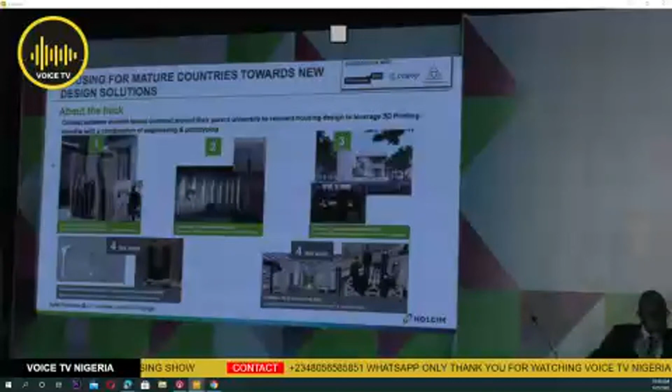For us, it's impressive, and we're quite happy. This is showing different aspects of the 3D work we create with various universities. For Nigeria, our approach is building a 2-bed hospital project as a CSR, somewhere in Shagamu, using 3D printing.

So in terms of technology and resources, we have it. We're working with a sister company of Lafarge, based in Kenya, that will be using this across the entire continent to run operations in Africa.

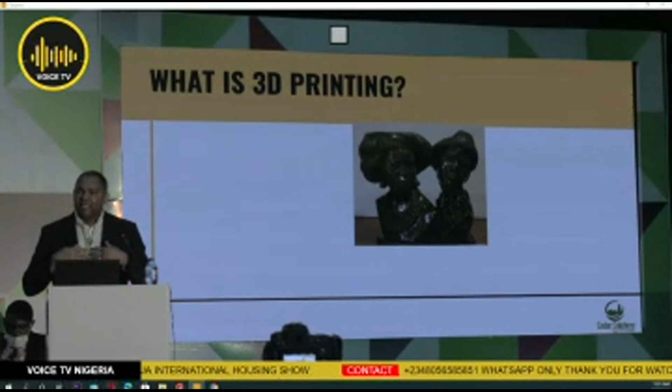But the first thing, of course, is that you need to come up with the product you want to design or fabricate, whether it's a house, an engineering part, whatever it is. The starting point for that process is the design, so you need to use design tools to produce what you want to fabricate.

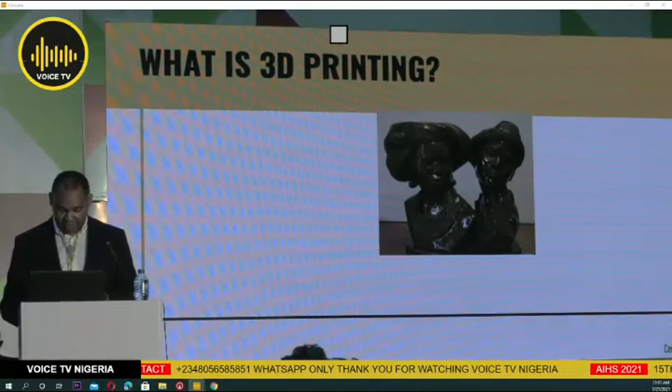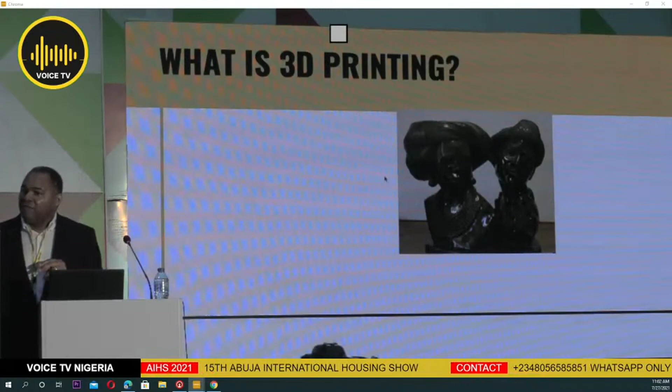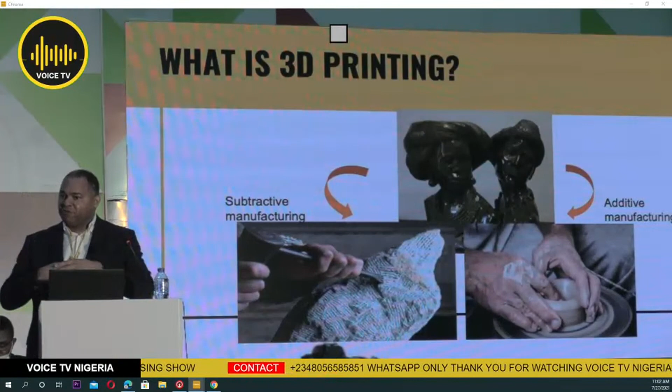I'll quickly give an overview of the process of 3D printing. Imagine you have a sculpture. There are two ways you can actually produce this sculpture. First is by taking a block of stone and chiseling out everything that doesn't look like the sculpture. The second is by having a free surface on which you start putting materials together until a 3-dimensional structure is built.

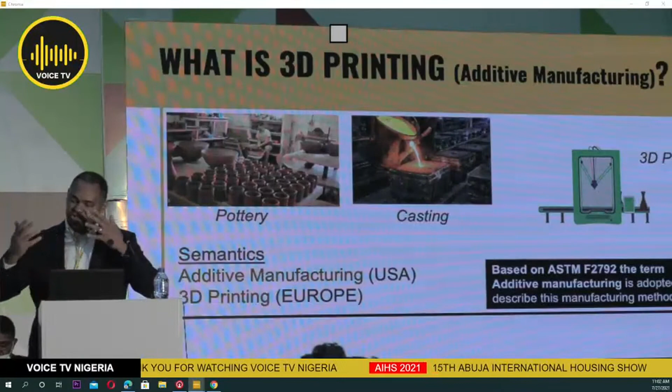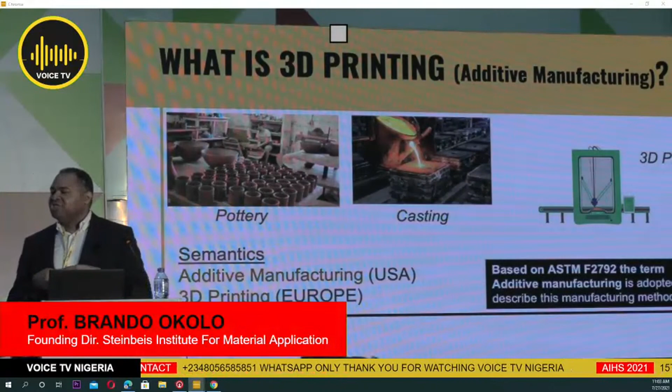So in both cases, in the field of manufacturing, the first example is called subtractive manufacturing, where you have a big block and chisel out material until you have your final product. The second is called additive manufacturing. I'll come to why 3D printing is being scaled up to additive manufacturing. Additive manufacturing involves putting materials together in whatever form, whether pottery work, casting, or of course 3D printing. So the word 3D printing is used generically to describe the technology, but strictly speaking this is called additive manufacturing. What you find in engineering textbooks, in academic literature, is the term additive manufacturing.

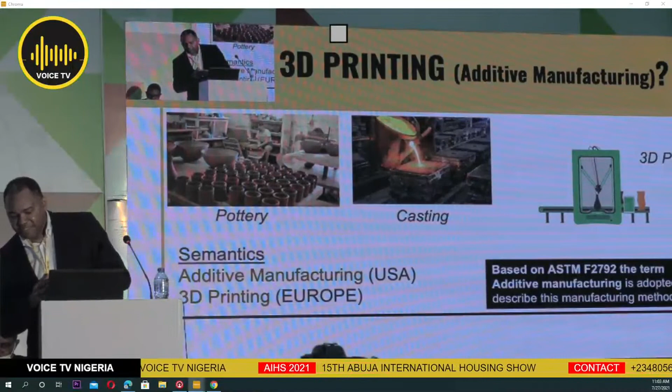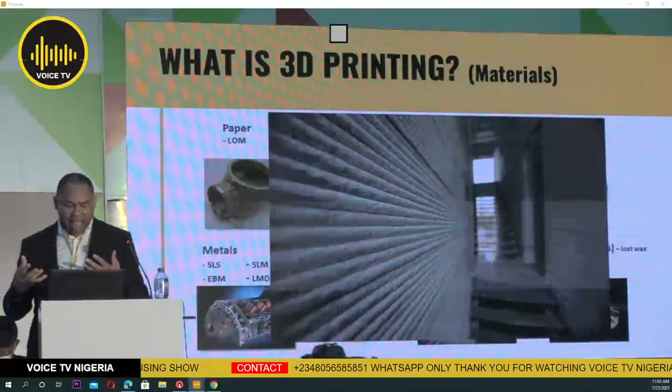And so today, essentially all existing engineering or technical materials can be 3D printed or additively manufactured. You can 3D print paper, glass, ceramics, polymers of all forms, metals, concrete as we have it today, and all kinds of other composite materials.

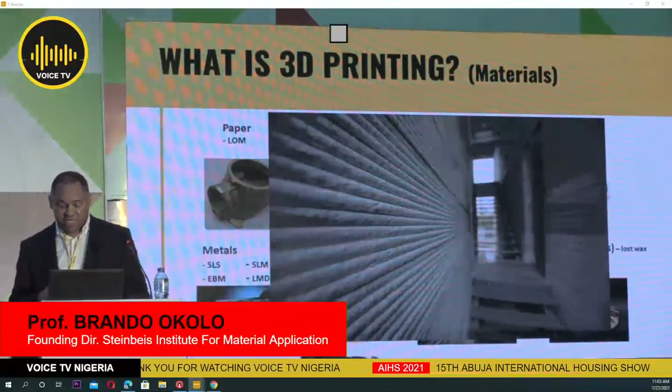So what does a 3D printing workflow look like? You start off with a design, and that design can be generated either using your computer-aided design tool, or you could use a 3D scanner to generate that design. The data you generate is then prepared for the printing process, which is simply a transformation of your data format into a machine-readable format.

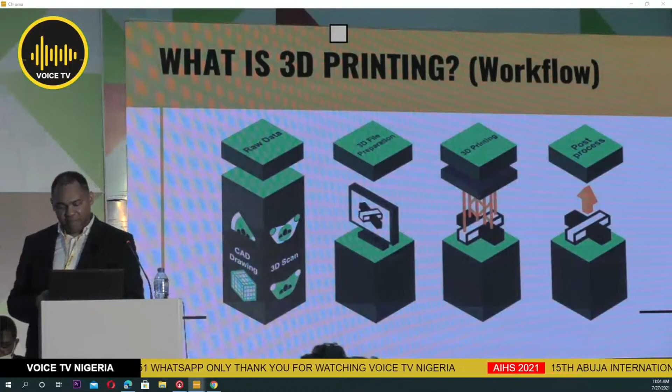And the machine-readable format allows you to print or lay down materials in a layer-by-layer fashion until your three-dimensional structure is formed. So you see a system that allows you to build structure, and build it fast.

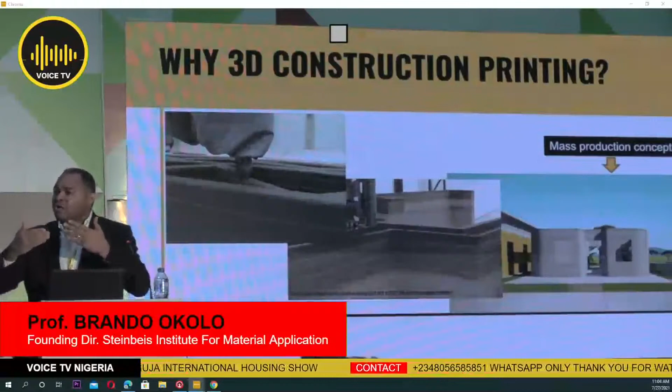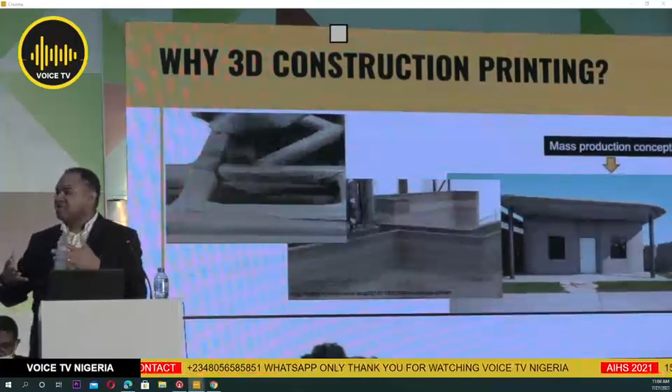If you could scale beyond just building one structure fast, you can go to a point where you're building several and building fast. Imagine this very conservative construction industry becoming a mass production line. This is what we're looking at, a case where you can take this technology and not just build one, but build several in a very intelligent way.

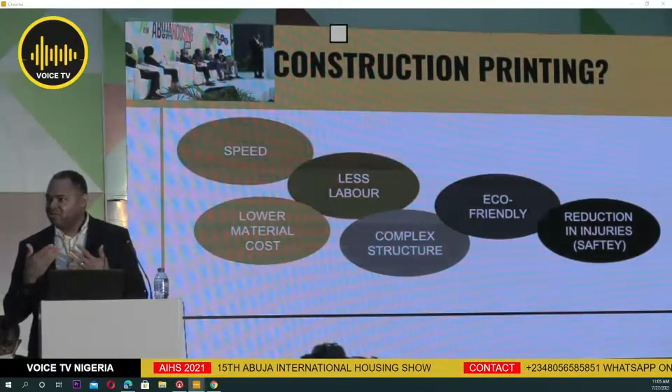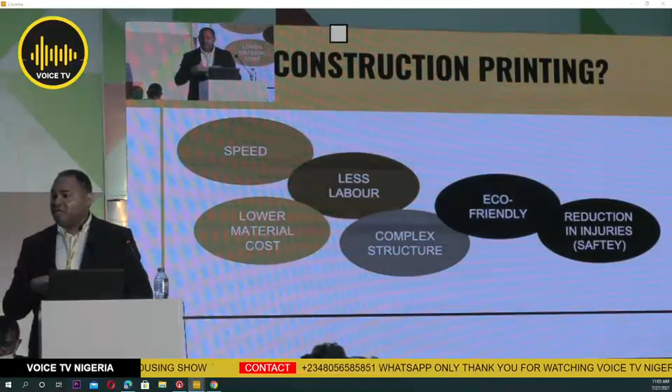The key components that make this technology advantageous are speed. Speed allows you, as an investor, to put your money down and as quickly as possible reap that revenue or return on investment. There's also less use of materials, because only the amount precisely needed is what the machine will lay down, and of course less labor.

I've had discussions with people here in Africa about the labor significance of using this technology. Labor is very cheap in Africa, so that doesn't matter as much. But we have other aspects of labor that allow this technology to come into play. The construction industry is a very muscle industry, where the labor needed on site is muscle labor, so you reach a certain age where you're no longer required even though you come with a lot of experience.

What this technology allows you to do is transition from a position where you use a lot of muscle to where you use brain power to build. It also allows women to come into the construction industry and perform, and allows the ability to build relatively complex architectural works. It's eco-friendly, and it reduces the injuries we find in the construction industry, which has a lot of human injuries.

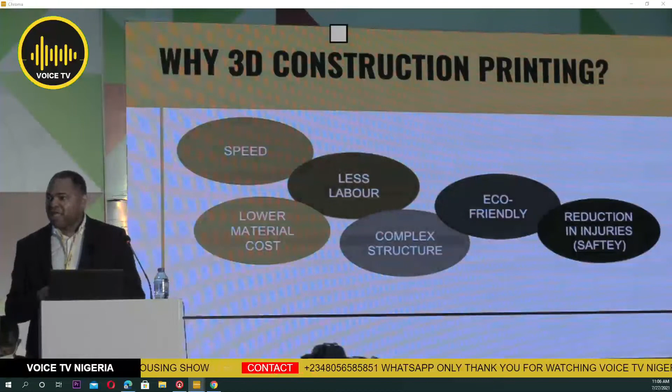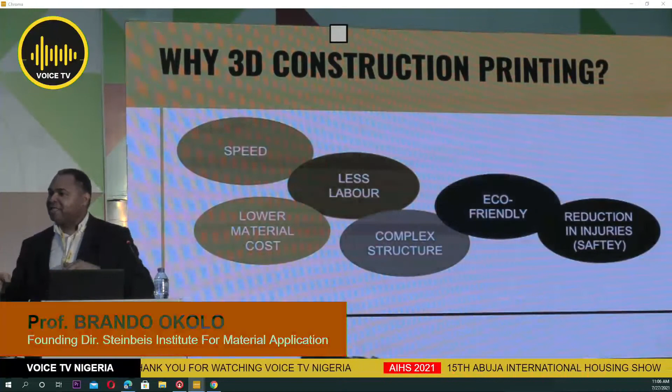You can significantly cut this down by bringing this technology on site. The good thing is the number of people you need on the construction site can significantly reduce. With this technology, you only need 3 people: your CAD engineer who drives the machine, your materials engineer who ensures the pumps moving material from a silo or reservoir to the print head are unobstructed, and a structural engineer to make sure all the materials laid down conform to engineering requirements.

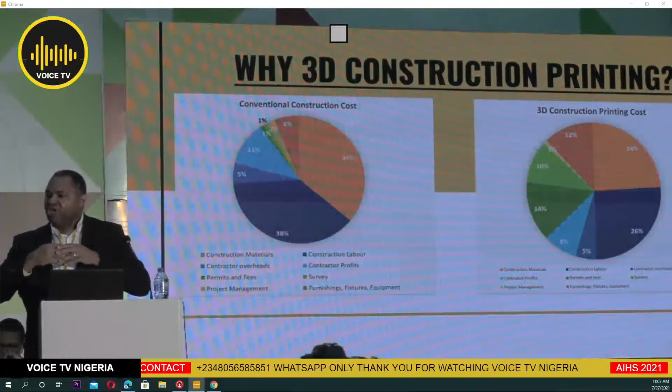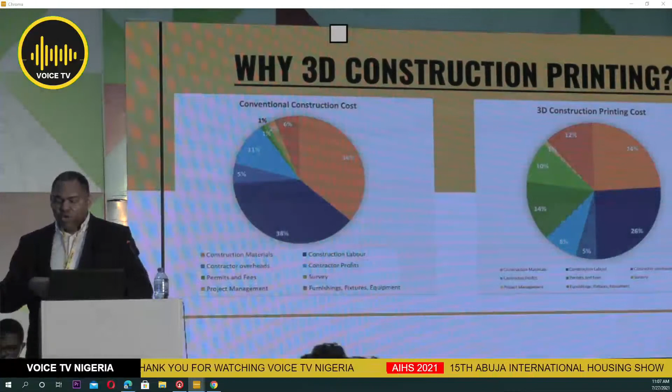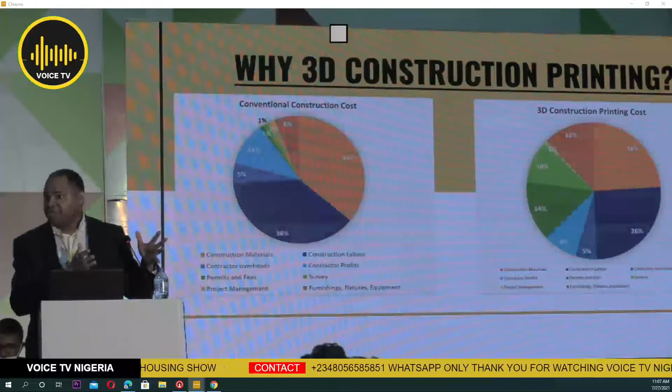From a comparative point of view, when you look at the entire value chain in construction - land, permits, materials used in building the superstructure, the fittings, the finishing - and insert this technology into your costing, the key areas of significant reduction are material and labor. Those reductions are significant, to the point where compared to conventional building, you can cut down cost by up to 50%. That is a lot, and this is what this technology offers.

When you look at the industry globally, the technology is still young, and so its use within construction is also quite young. But we already have a space populated by all kinds of groups - groups working on machine manufacturing, groups working on materials manufacturing like Lafarge, and groups working on the software used to drive this technology on the construction site.

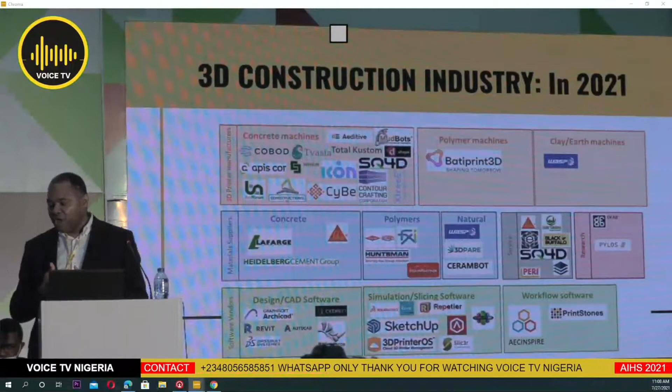So I've put up these companies to give you a sense of where they are, who they are, and which fields they are working on. There's still a lot of work to be done, and I think we'll get there at some point.

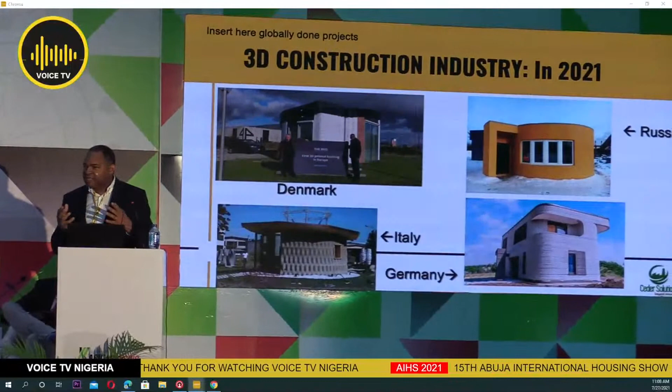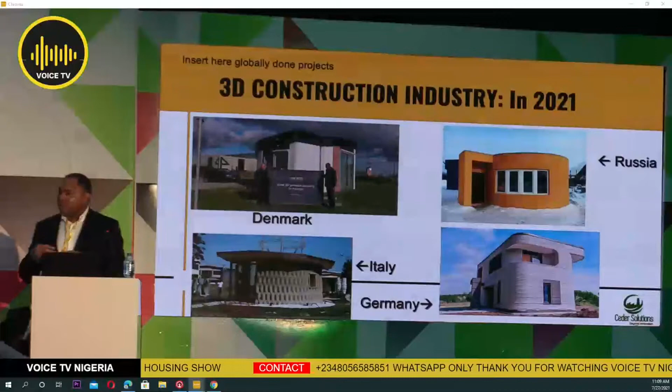So globally, 3D printed houses exist essentially on all continents as we speak today. In Denmark, the company which Lafarge partners with, Cobod, are the machine builders. We also have a partnership with them. They'll build the first 3D printed house in Europe. We have houses now printed in Italy using earth and mud. We have houses in Russia, in Germany, of course. We have the first family-built 3D printed house existing in Germany, in France, in the USA.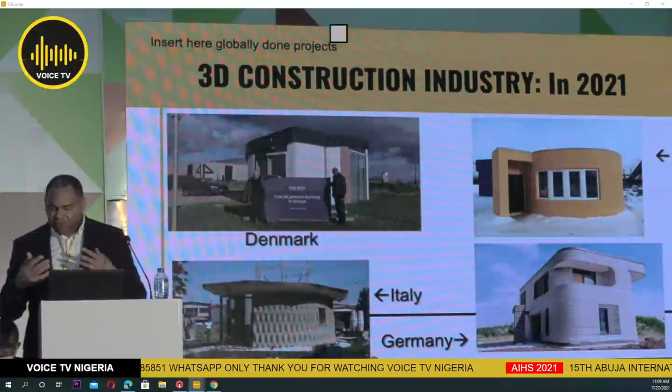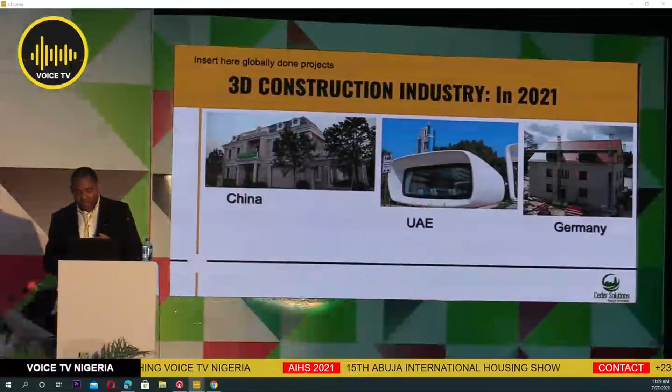In the USA, in Belgium, in India, in China, in the UAE, in Saudi Arabia, and in Malawi, which is the first encounter this technology has had in the construction industry within our continent.

So what does this technology hold for us beyond today? The transformation we expect to find also in the construction industry could start. We already have software tools, the so-called BIM, the Building Information Modeling tool used in the construction industry, that allows you to have a complete overview from the idea to the point where you actually have a finished product. You check on your cost, the amount of material used, the timing, the scheduling. The insertion of 3D printing technology within this tool will revolutionize that sector.

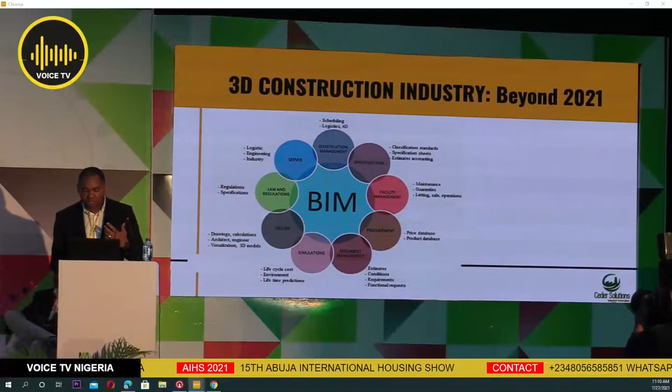It would allow you to approach a client, say this is what I want to build, and the client says this is what I want to build. You interface with the client on a computer surface. The client is able to scale the land they've bought to the architectural work. It allows the client to have all kinds of optical understanding of the architectural work they want built up, the simulation work, the time it would actually take to build that structure, the amount of materials needed, the renderings—giving the client a completely new experience about the project work they're trying to build up with you.

It allows the client to understand what's happening on site without being physically on site. And of course, it allows the client to have a first-hand understanding of what it will be like to have their own house. So this is where we are—at the point where the data generated from the architectural studio to the data generated on the construction site gives the client, and gives our economy, a completely new experience.

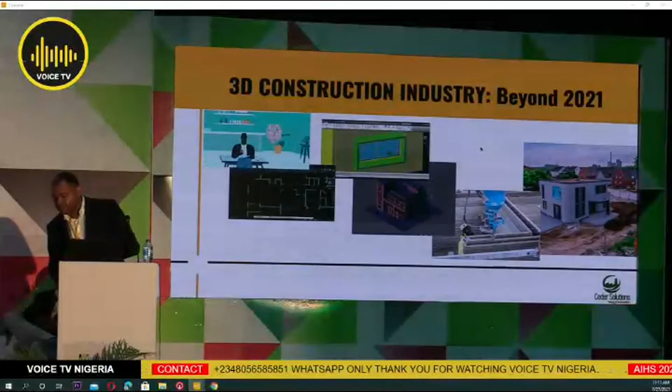We've heard, for my conclusion, that the affordable housing gap is widening and that bridging that gap is difficult. I don't want to debate over the numbers—whatever the numbers are, we have a problem. We have an affordable housing gap, and that has to be bridged somehow. Using conventional manufacturing methods, we cannot easily bridge it. So we definitely need a technology that will come and speed up that process of bridging this gap.

In terms of cost, this technology would allow not just those in the middle income class, but also those in the low income class, to be able to own their own building. So my appeal to you as a community deeply involved in the construction sector: bring this technology not just into the Nigerian construction world, but look at Africa. You are industrial heavyweights—go beyond Nigeria, adopt this technology, and do something unique for our continent. Thank you very much.